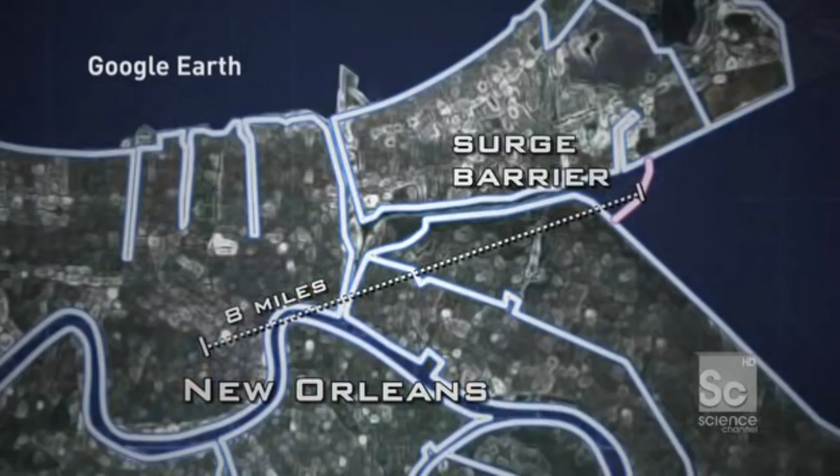To avoid this disaster happening again, the surge barrier is being built miles away from downtown New Orleans, where it can stop the water before it enters the city. Instead of waiting for the storm to come to them, for the first time, they are taking the fight to the storm. Is this a new way to think about battling hurricanes?

Nowhere in the world have we built a wall trying to keep out 25, 26 feet of water. No one's ever done it before. And this height here on a storm surge is unique. You gotta remember, the hurricanes that come to New Orleans are bigger, meaner, and there are more of them.

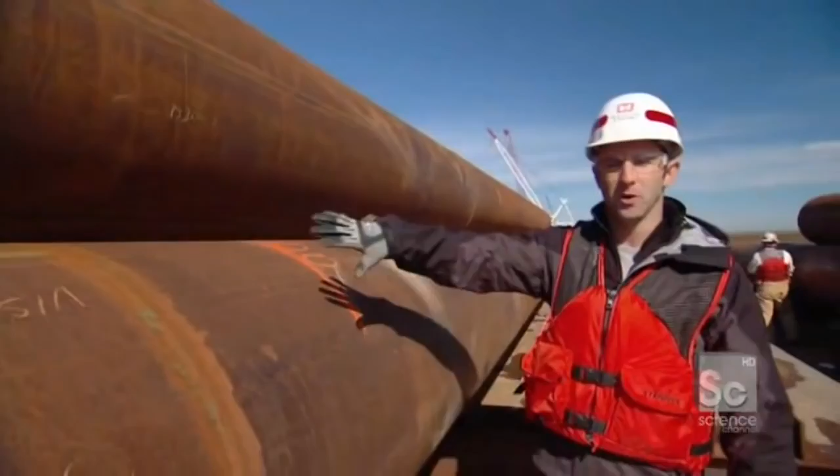To hold back a 26-foot wall of water, the barrier is fortified by 628 batter piles. When the storm surge hits the wall, what pushes back and keeps that wall upright and strong are these guys right here. They're called batter piles, and they're basically 288-foot-long steel tubes inserted into the back of the wall that support it and transfer all the loads of that storm surge into the foundation.

Since there's no bedrock to hold the pile in place, over 80% of the wall is actually below the mudline. The deeper the pile is driven, the more friction there is to hold it in place. Each pile is almost as long as a football field and placed at an acute angle for added stability.

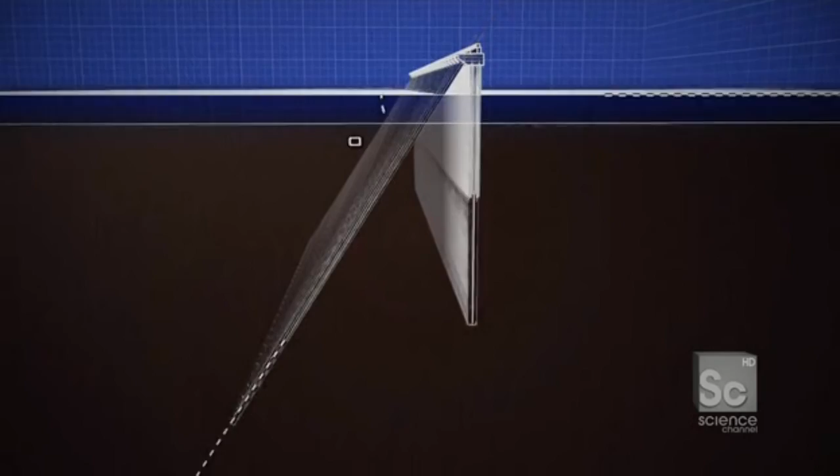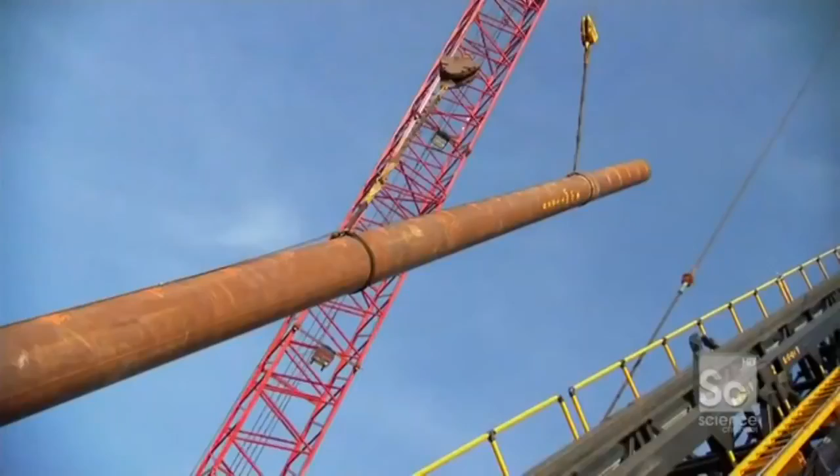What'll be interesting about this lift is that this pile right here is horizontal, right? But in the end, we have to get this thing at a 57-degree angle to feed it into the machine called the leads. No one has ever attempted to drive piles this size at an angle before.

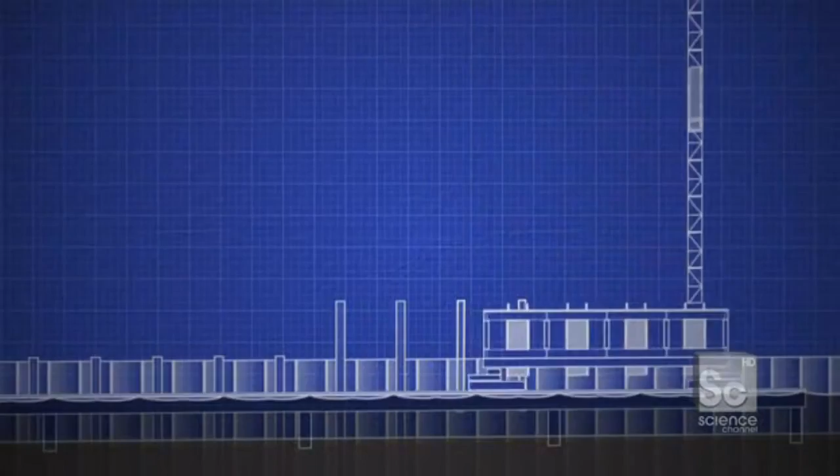To accomplish this engineering first, the Army Corps invented a massive 1,000-ton machine called the leads. Unlike traditional pile drivers that can only hammer vertically, the leads can hammer the piles at a precise 57-degree angle. And with 4 chutes, they can drive 4 piles in a row before moving on, saving almost 5 months of construction time.

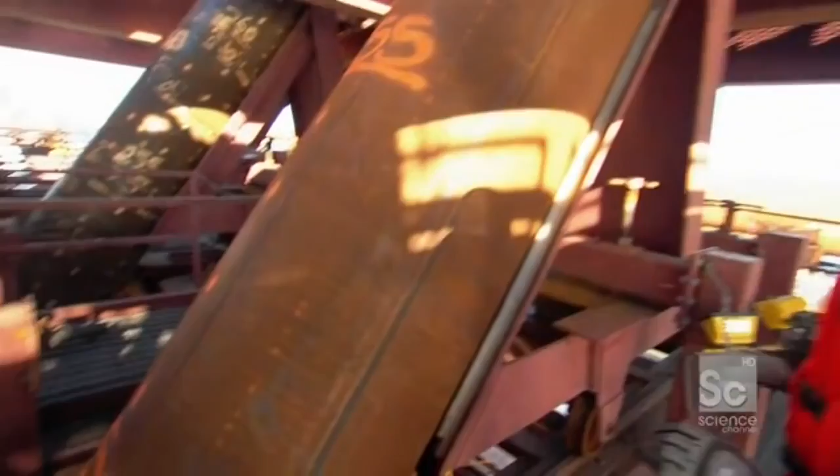So here it is, lowering it through the leads, right? The thing that's leading it right down this 57-degree angle, getting into position so we can start knocking this straight into the ground. Even the leads isn't big enough to handle a 300-foot-long pile in one go.

So they're driven in two sections. The first section is 158 feet long and weighs more than 13 tons. So, Mike, as I'm looking at this slowly creep down into the earth, this is just sliding into the soil below, right? Into the mud, yeah. I mean, there's really nothing down there, huh? Not much. I mean, it's soft. It's so soft that the pile sinks 38 feet in a matter of seconds under its own weight.

After that, the friction from the mud becomes too great, so they have to use a hydraulic hammer. Do I run that hammer down? Absolutely. Time to drive the hammer.

So it's your job to control how much force this thing hits it, when it hits it, and how you drive the pile down. That's it.

So before the sun sets today, we're going to start smacking this thing and send it in? Right now, the next 2 minutes. If everybody's ready, got the earplugs on, let's go. Let's do it. I got earplugs. I'm on. Let's start smacking it.

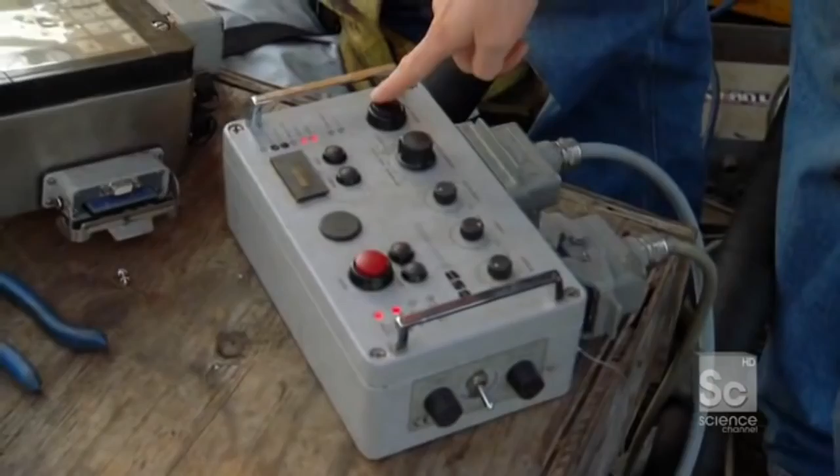Every time that smacks the pile, that pile gets pushed a little deeper into the ground. During the first 158 feet of driving, each blow moves the pile 10 inches. But as the pile goes deeper and friction increases, it takes 40 blows to move the pile that same distance.

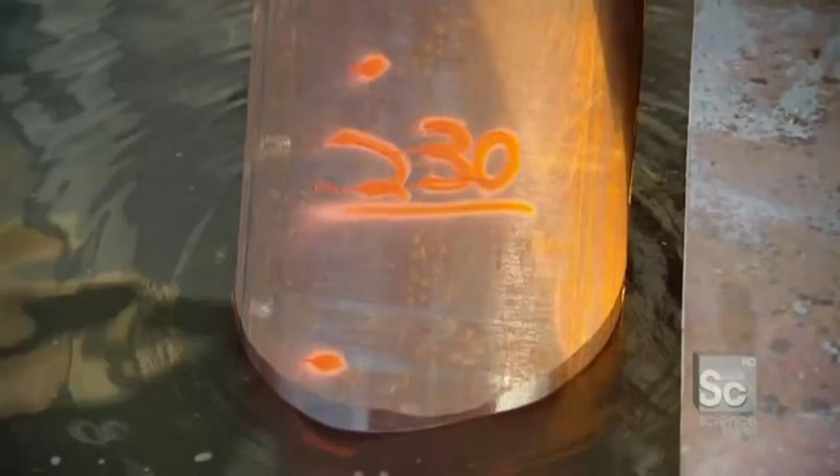So, Mike, the first piece is now in place. Right. And now they're going to bring over the second piece, which is that one right there. Right.

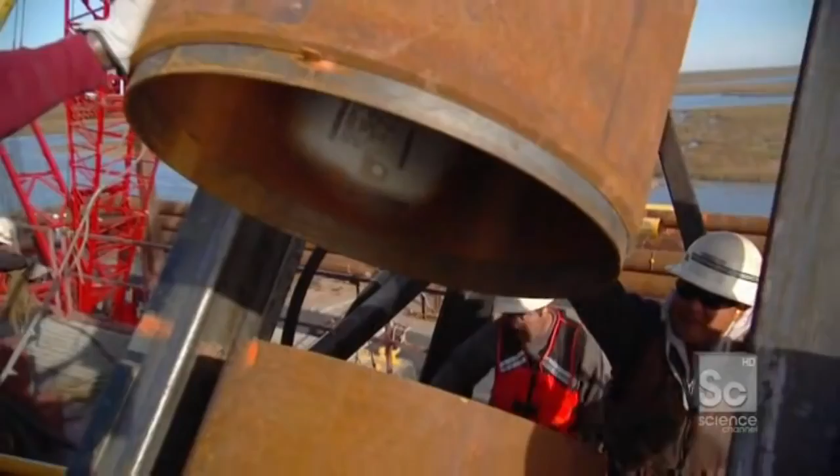Loading like a rocket launcher almost. They have to get the piece in, tamp it down, and line one end up with the next. Line it up, line it up! All right, so here it is, it's coming down. You can see we're basically gonna fit this piece into that piece, have a little bit of an overlap, and that's what they're gonna weld together.

So if you look right there, you can see the weld's been completed. Those two separate pieces have now been spliced into one, and now that pile is 245 feet long. The weld looks good. Yes, sir. We're ready to drive it, put it on the ground. This is the last time we're gonna see this pile in the air.

So let's flip the hammer on and start smacking. Are you ready? Yes, I'm ready. Whenever you're ready. I'm ready. I was born to smack pile.

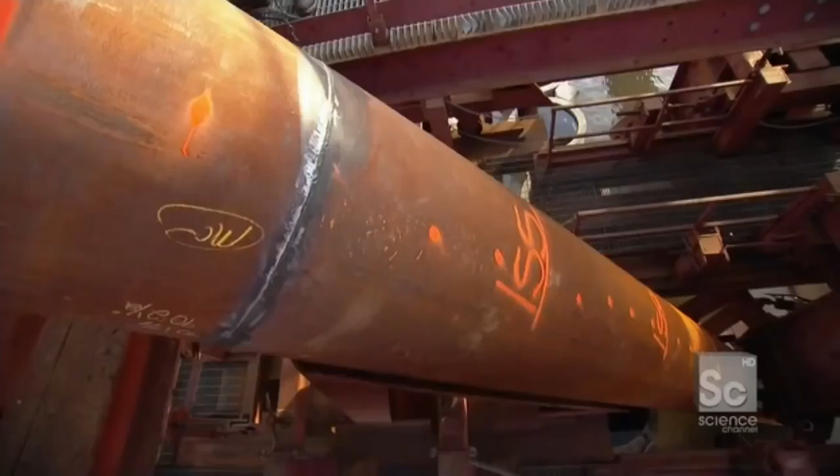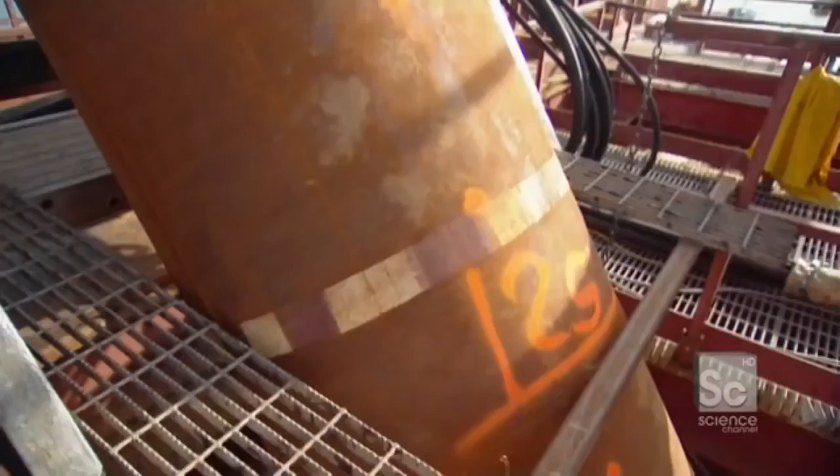It takes around 1,200 blows to get one batter pile into place. And to stay on schedule, they need to install 628 of them in just 6 months. A total of about 750,000 blows. Normally, a project of this magnitude would take more than 17 years to complete. To make New Orleans safe as quickly as possible, the Army Corps is attempting to finish the surge barrier in just 3. To pull off this incredible feat, this crew has to work through hurricane season.

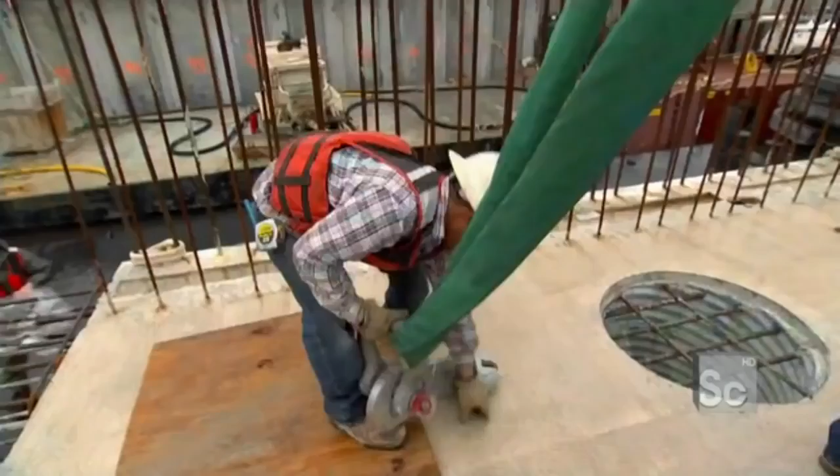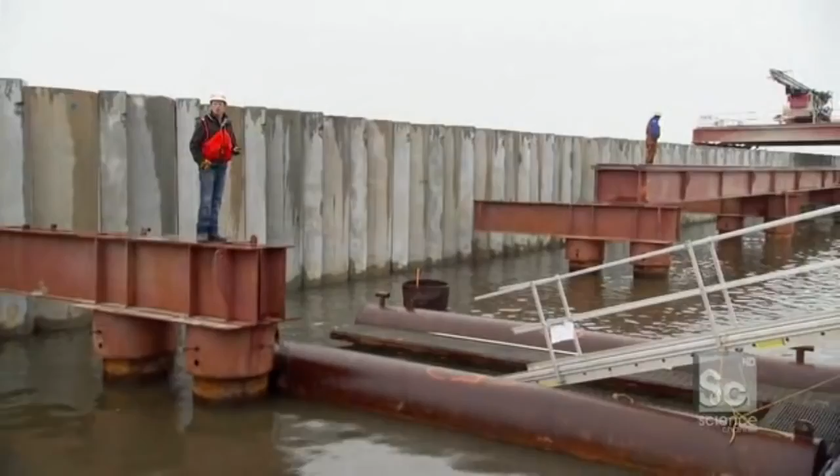So engineers came up with an innovative solution to get the job done right and done fast, even in rough waters. One of the biggest challenges when you're working in the middle of a lake is having a level surface on which to work, because barges move and tugboats pitch and roll as well. So in order to have a flat surface to accurately work, they developed that system right there called a trestle. It's a semi-permanent track that moves along with the wall construction. A trestle is basically a huge railroad track anchored into the lake bed, providing a stable workplace for large machinery.

The project has 1,000 feet of track for the entire 10,000-foot-long wall. So to keep construction moving forward, the trestle team has to leapfrog 50-foot sections from one end of the site to the other up to 6 times a day. 50 feet of trestle track's about to go from this barge up in the air and extend our construction platform another 50 feet.

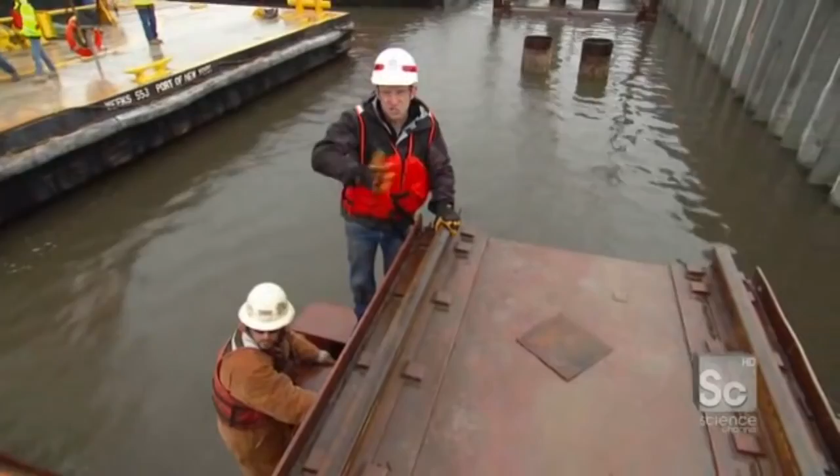6 bolts need to be in place to ensure a solid connection between the trestles. The issue is we have 5 out of the 6 bolts lined up, but one side is slightly higher than the other side, so we're having a problem getting in the final bolt. The holes are about 3 millimeters off. In order to make that space to get it through, we're going to torch it out.

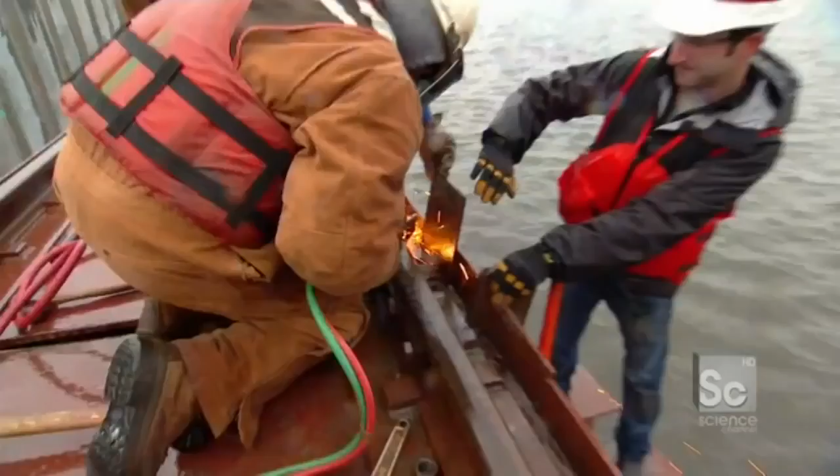Would it not have made sense for me to move before he started? On the plus side, it's really cold and rainy. My right hand is much warmer than it was a minute ago.

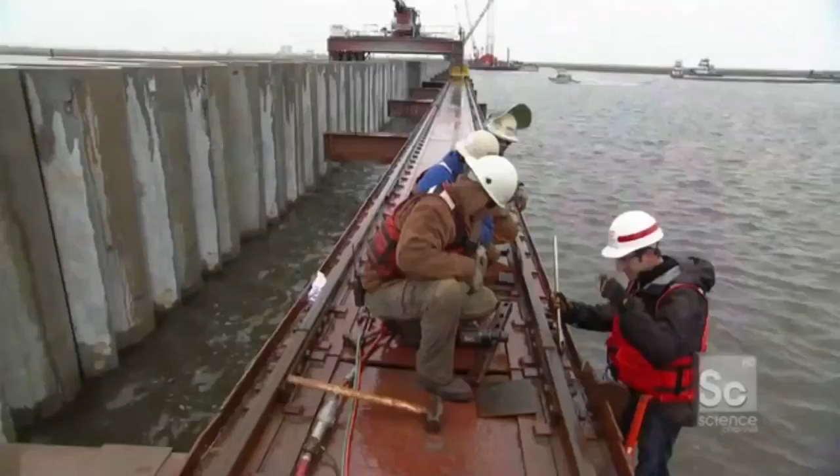Well, after cutting, torching, hitting, and some emotional consternation, the sixth and final bolt gets a smack and is through. This track has now been extended 50 more feet. The construction site will extend. Can we go home? We finished now?

Up next, building new lives and new hope in the 9th Ward, with houses designed to fight back against the worst Mother Nature has to offer. These houses are being built to survive another Katrina.

When you think about what took place in New Orleans, you think about Hurricane Katrina. But the truth is, the actual damage wasn't from the hurricane itself, but from what it created: a storm surge. A storm surge is a wall of water pushed out in front of a hurricane by high winds and low pressure. During Katrina, it caused waters to rise more than 20 feet, overwhelming the existing hurricane protection and flooding almost the entire city.

Katrina's storm surge was responsible for 90% of the destruction in New Orleans. And hardest hit was one of New Orleans' poorest neighborhoods, the lower 9th Ward.

I was actually here filming 5 years ago, right after the event, and it was harrowing. There were houses that were just blown clear off their foundations. Others were torn in two. I saw a house that was actually sitting in a tree. 5,000 homes were lost in this neighborhood alone, and less than 20% of its residents have come home to rebuild.

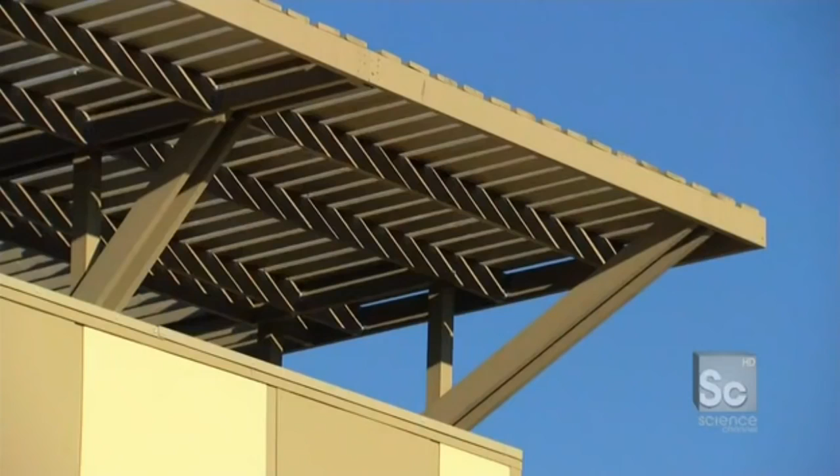Just come back. To help people like Miss Leggett come home, actor Brad Pitt founded an organization called Make It Right. Their mission: build 150 cutting-edge homes, safer and more sustainable than ever before, starting in the most devastated neighborhood in New Orleans.

This is one of the areas that's hardest to build back because of the soils and because of the amount of displacement that occurred. We plant the seed in the toughest soil, in some of the toughest situations, in hopes of starting development throughout New Orleans, but starting in the hardest area. It's incredible, an amazing project. No matter which aspect we look at, there's something incredible going on.

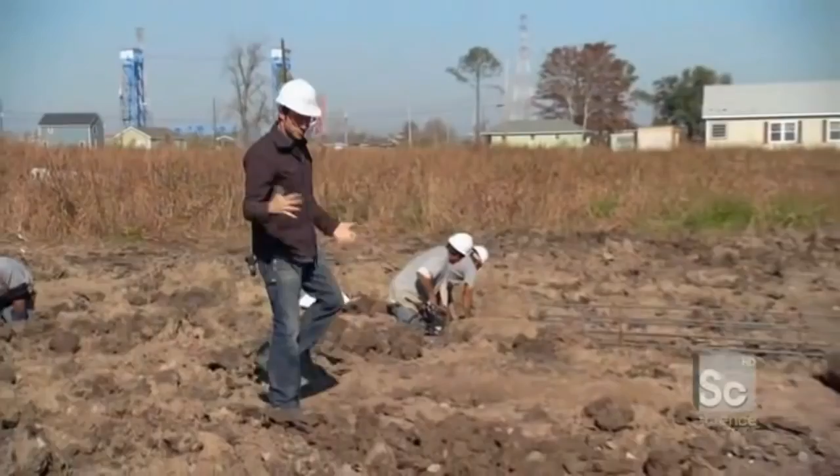These homes are re-engineering the lower 9th Ward and transforming it into one of the most hurricane-resistant neighborhoods on the planet. But one of their biggest challenges isn't wind and rain, it's the ground itself. Like most of New Orleans, the lower 9th Ward is built below sea level, which basically means the ground below me is a big swamp. You build a house here, over time, it's gonna sink.

So to prevent that, the Make It Right houses begin construction by driving massive 40-foot-long piles into the earth. This is what they had before Katrina, and this is what they're getting right now. So these are built to last. These houses are built to survive another Katrina. These piles are revolutionizing how homes are built in this flood-prone area.

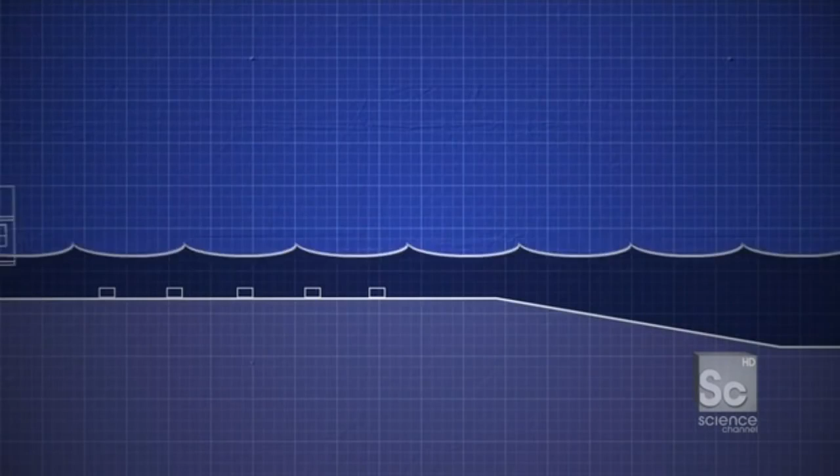Previously, homes rested on top of cinder blocks. When a flood came, the house would be lifted off the blocks and sent crashing through the neighborhood. But now, these wooden piles stabilize the soft soil so it can support a raised concrete foundation. It actually attaches to the house, strong enough to keep the home in place, even in floods more than 12 feet high. Chris, how do you get a 40-foot pile rated to carry 7 tons into the swamp?

You use that machine over there, which is called a sonic side grip vibratory driver that puts out 50 tons of centrifugal force, and it'll push that pile underground in about 2-3 minutes.

So this is it, huh? This is the machine. It's like a construction action hero. My God. Tony, why don't you spin her around so we can look at her? This has got a kind of a Mad Max Beyond Thunderdome vibe to it, you know what I mean? Yeah, I never get tired of watching it work.

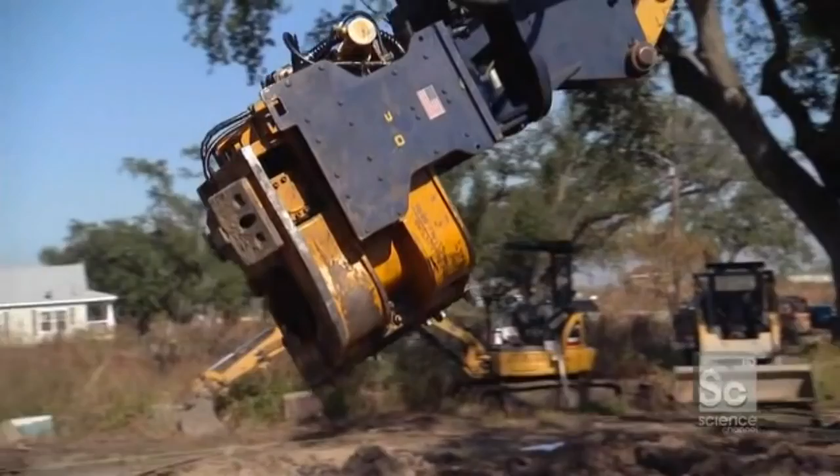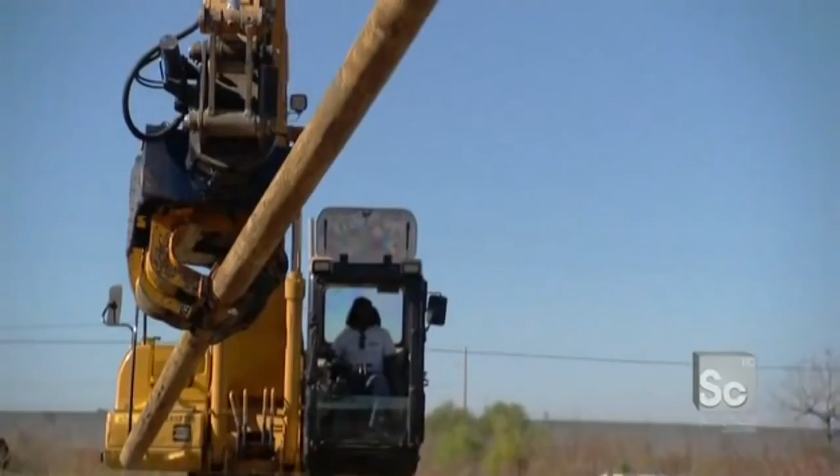No one has ever used a pile driver like this to install foundations in the lower Ninth Ward. Its unique articulating arm can grab, lift, and drive the pile all in one shot. The work gets done 3 times faster than if they used a conventional pile driver. Grabs it by eye, swings it into place like it's his extended arm. Exactly. Puts it right down in a matter of moments.

Tony says the only place he really feels at peace is in that machine. You can kind of see that too, right? Yeah, oh yeah. To lift and move a pile requires careful coordination of 6 controls all at once.

Tony's located the pile right in the corner of the foundation. We have a little circle mark for him, and he's just gonna put this thing dead smack. Perfect. He's lined up, he's level. Now it's time to vibrate. Tony, you ready?

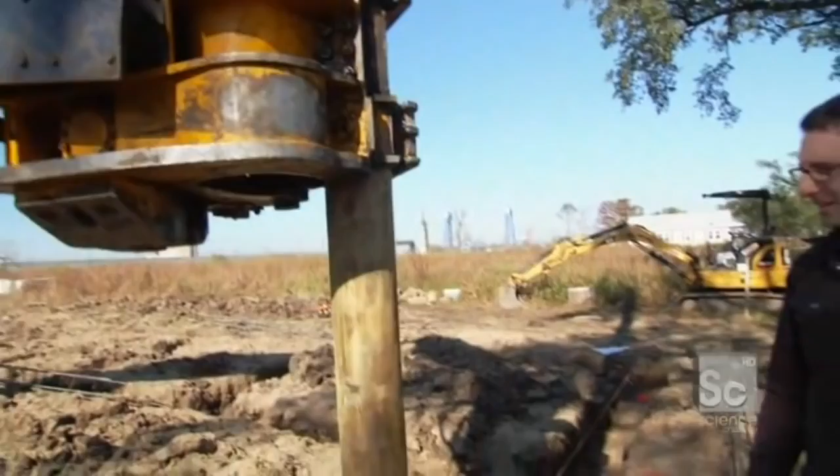You literally feel the ground shaking, within like a 5-foot radius around Tony's workings, like my feet, my toes, my back. I'm itchy right now from the vibrations running through me.

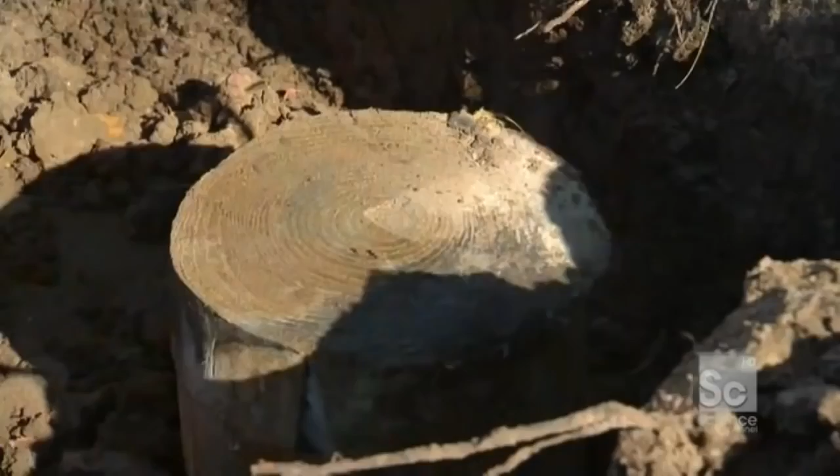So now what I'm standing on, even before the foundation gets here, is 40 feet of pile below me. And it's from this point the house now begins.

Is it hard for a rookie? The hardest part's picking the pile up. Let's give it a go. I'm gonna drop some piles. Okay, so you're Tony. Yes. I'm Danny, nice to meet you, Dan. How you doing, man? I'm okay. We're gonna switch jobs. You do the yelling and walking around and talking and not doing anything productive. Sounds like a winner. And I'll do the work. Sounds like a plan. All right, Tony.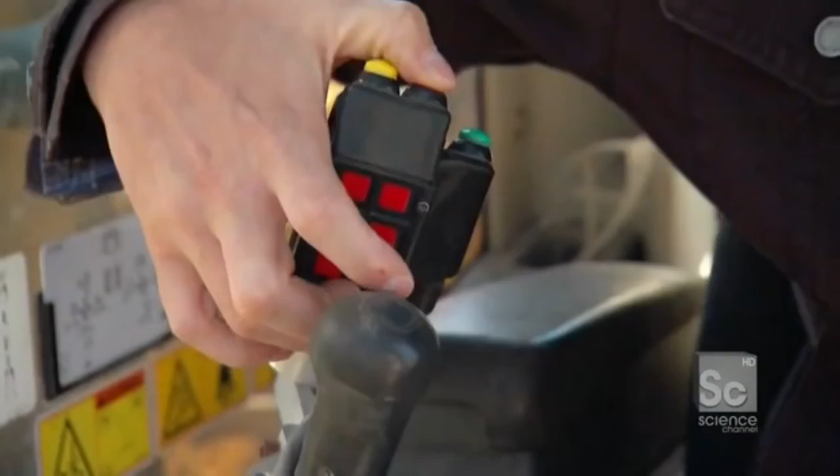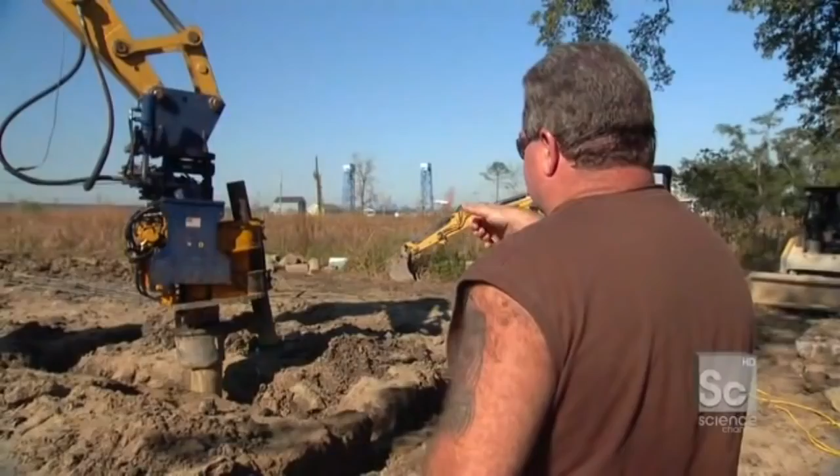Swing left over. Oh, so close, it was like I'm about to eat it. It was like, oh, here we go. Open, open, quick, clean. There we go, come here. Oh, it's in my clutches. It's coming up, I got me a good grip on it. Chris, watch this man, this is gonna be a little piece of magic. Can't beat that. How's she looking? First time out, that's not too bad.

Now tell me something, you're from here, right? Born and raised here. So regardless of the next event, next storm, if it happens again, you come back? We're coming back, this is home. This is life, this is reality here. I come here sometime with my kids just to show them the houses, you know? This is what we're doing, we're bringing people home. It's good stuff, man. No, it really is.

Thank you, it's amazing. Up next, putting together the strongest wall ever built, and we're gonna literally thread the needle in some of the worst soil conditions in the world.

Since it was founded in 1718, New Orleans is a town that's been working against the elements, primarily because 50% of this place is located below sea level. But for the first time, New Orleanians are trying something new, working with nature instead of against it. New Orleans is built on top of a giant marshland, which for millions of years naturally absorbed thousands of gallons of rain and floodwater. Today, most of that spongy marsh is covered by pavement, causing significant problems for this flood-prone city.

In a typical situation, when it rains, what happens to that water? How does New Orleans deal with it? That water runs off, goes to our curb and gutter, goes about 8 blocks to the north of us, and is pumped over a levee at about 2 cents a gallon. Okay.

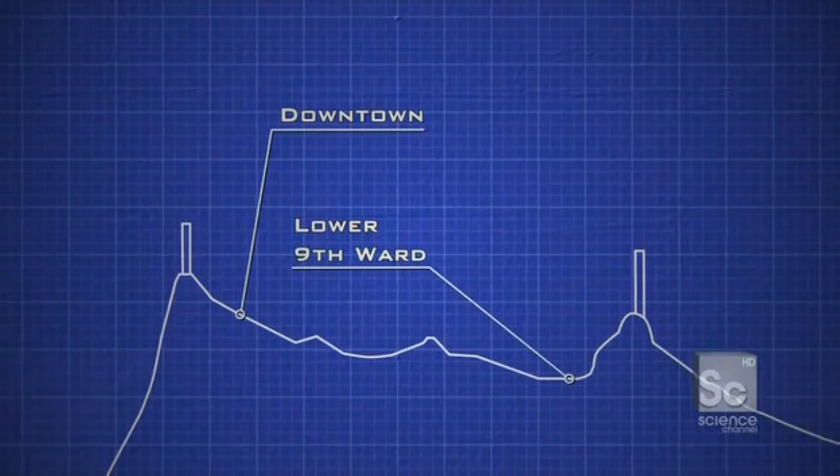Over half of New Orleans is located below sea level. This paved city is basically a big bowl. When water comes in, the only way to get it out is with pumps. So when the pumps failed during Katrina, the lower Ninth Ward was left underwater for more than 3 weeks.

We're in a situation where our community has a real fear of water, and it's a valid fear of water. So the folks in this neighborhood have a different mindset on water, and we're trying to change that paradigm.

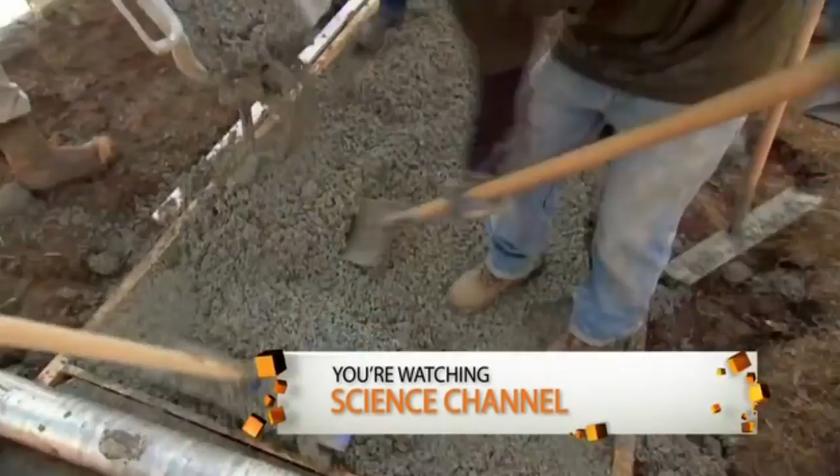To make sure this neighborhood is not left underwater again, engineers have found an innovative solution to radically reduce the need for pump stations, called pervious concrete.

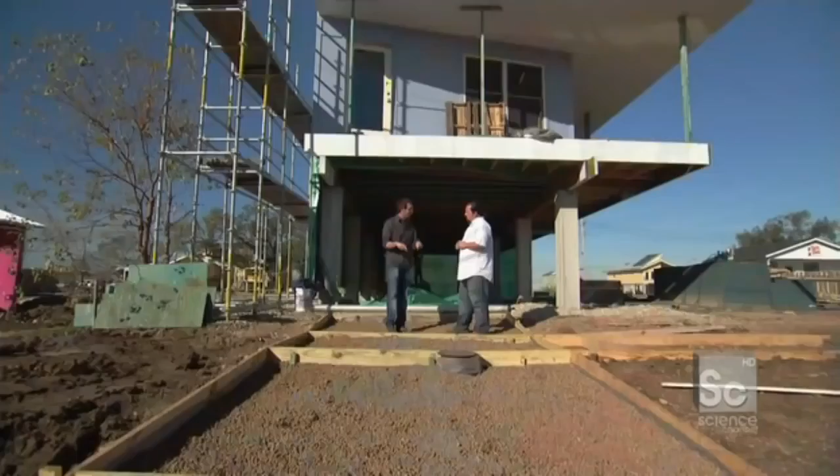As water runs off of our site, it does the opposite of what typical pavement does. Instead of a giant table that tilts water and flows it to the curb and gutter, this is a giant sponge that accepts rainwater, stores it in the concrete and below, and doesn't hit the curb and gutter and run off our streets. So you're telling me this driveway and this sidewalk, when rain hits it, it's actually going to absorb that water?

Correct. Unlike conventional concrete that repels water into the storm sewer, pervious concrete absorbs it. Filled with tiny air pockets, it allows water to flow through it and into the native marshland below, where hundreds of thousands of gallons can be stored naturally.

Do you have any actual finished stuff that we can see? Yeah, we have a little mock-up right here. It actually does look like a Rice Krispie treat. Rice Krispie treat. Look at that.

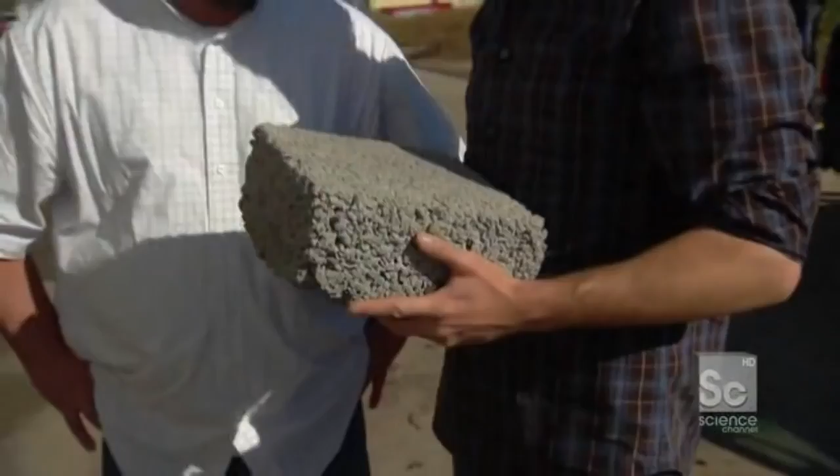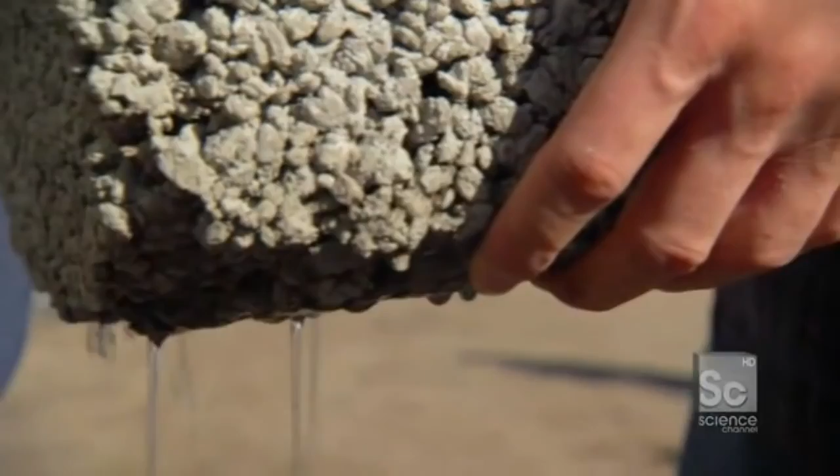All right, let's simulate right now. I'm a driveway, you're a rainstorm, and the rain's coming in. It just stores up, it's just eating it like a sponge. And then it comes out the bottom. Look at that. Now, typically, all that rain we just dumped down would go from this driveway into the sewer system and have to get pumped out. Correct. At ultimate build-out, we will be saving several hundred thousand gallons of water hitting the storm sewer every rain event.

And that all starts with you, me, and a bunch of guys pouring some concrete. Absolutely. Here it comes.

It doesn't look normal, right? It's much drier, thicker, and chunkier. Because of this consistency, pervious concrete pours much slower than conventional concrete and dries much faster.

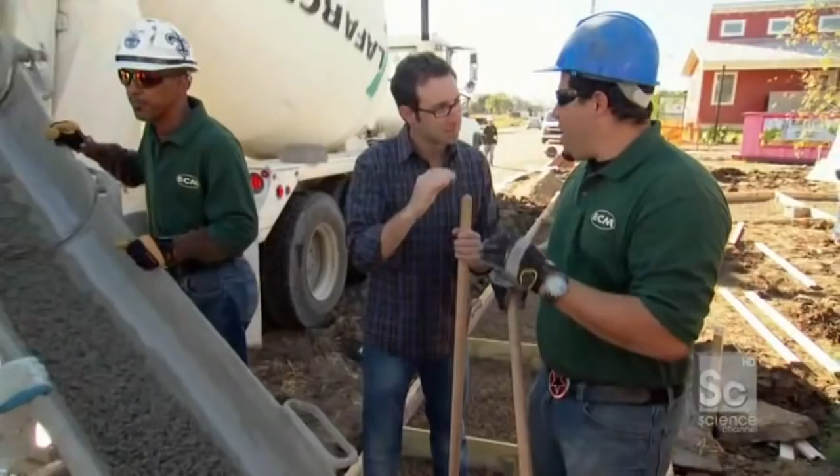So we have just 15 minutes before the concrete sets. So we're actually trying to push the concrete out, but then actually compact it. Yeah, we're gonna compact it. We're gonna pour it three-quarters of an inch higher.

Got it. What I'm doing right now is sort of the opposite of what you do with normal concrete. Typically, you vibrate concrete to get the air bubbles out. Here, we actually compact it tight to get lots of air bubbles inside of it. That's how the water goes through it.

Compacting the concrete is the most critical part of the process. If it's compacted too tight, it won't absorb the excess water. Too loose, and it'll crumble. To do the job quickly, they use a specialized 150-pound roller called a screed.

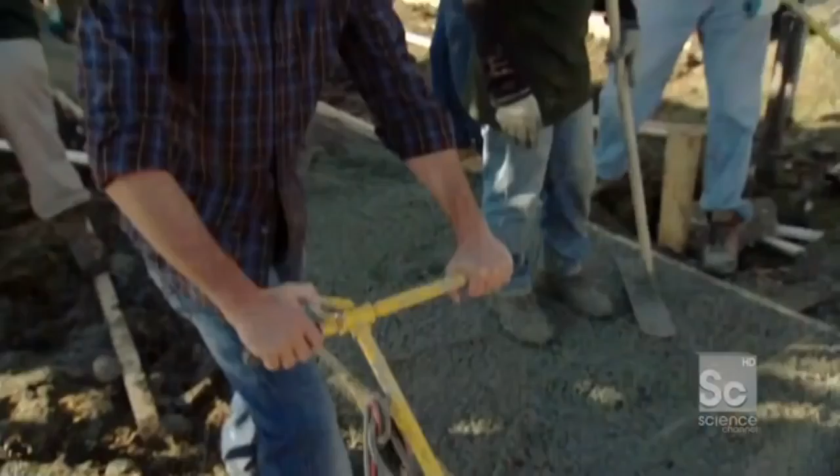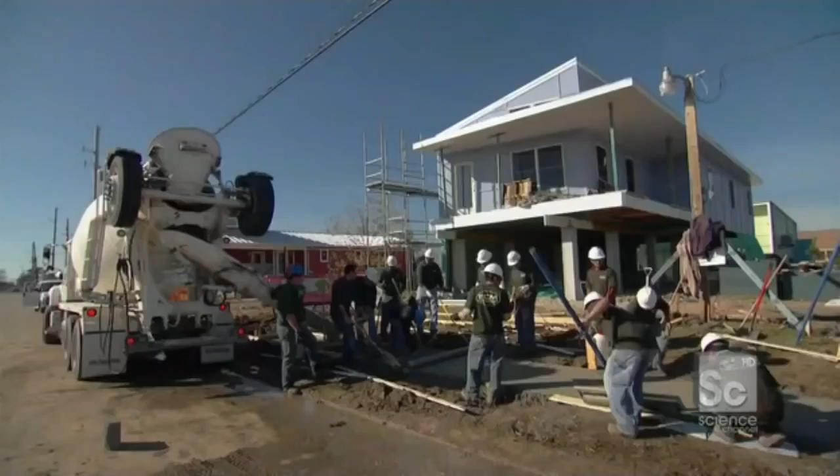Ready? You want to pull it? Yeah, now I'm pulling it. All right, come to me. Here we go, stay with me. Here we go, nice and slow. I'm making pervious concrete. You know why? Because I don't want concrete to push water into the sewer system, do you? No, you don't. Good job, good job, that was perfect.

Beautiful. And although it may not look like it, this is actually the finishing touch. This is the layer of concrete that you'll see every time you walk down the Make It Right streets. Big, hard, dense Rice Krispie treat that all the while is sucking up the water and making sure it does not go into the streets. I love it, man.

The concrete will absorb 5 gallons per hour, using Louisiana's natural marshland to keep the neighborhood dry. That same absorbent soil, however, is the biggest problem for engineers building the 2-mile-long surge barrier.

So for me, what I'm fascinated by is that you want this to be strong and heavy and beefy. But if it's too heavy, the soil's so weak your wall will actually start sinking. That's one of our challenges. We need a very strong wall, but you also need a light wall, comparatively speaking, for concrete of course.

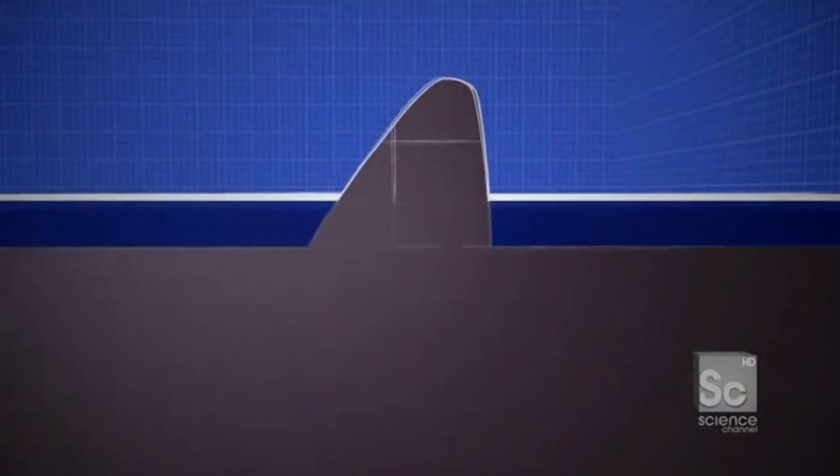We can't build a Great Wall of China here because the massive weight of it would simply sink out of sight. Instead of building one solid structure like most levees or dikes, engineers designed the New Orleans surge barrier as an A-frame. It uses half the material, but it's actually stronger than a solid structure.

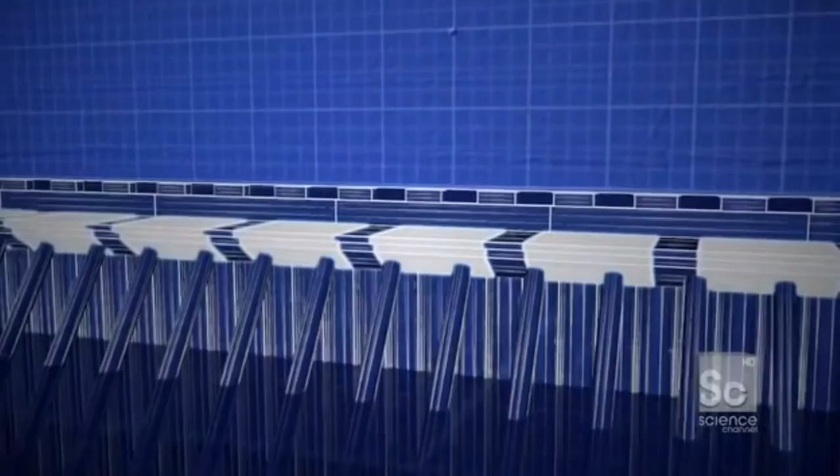The key to its strength? 330 concrete caps placed at the top of the A. They link the vertical piles to the batter piles, directing the force of the storm from the front of the wall, through the batter piles, and down into the marsh, dispersing the loads and keeping the wall strong but light.

All right, so Vic, when the soldier piles are in, the batter piles in place, what ties them all together and makes them one structural system are these guys right here. That's right, these are caps. So essentially, your chain is as strong as your weakest link. Yeah, absolutely, and this is the link, essentially. This is what connects the two types of piles. This 96-ton piece of concrete, very high-tech design, transfers that energy.

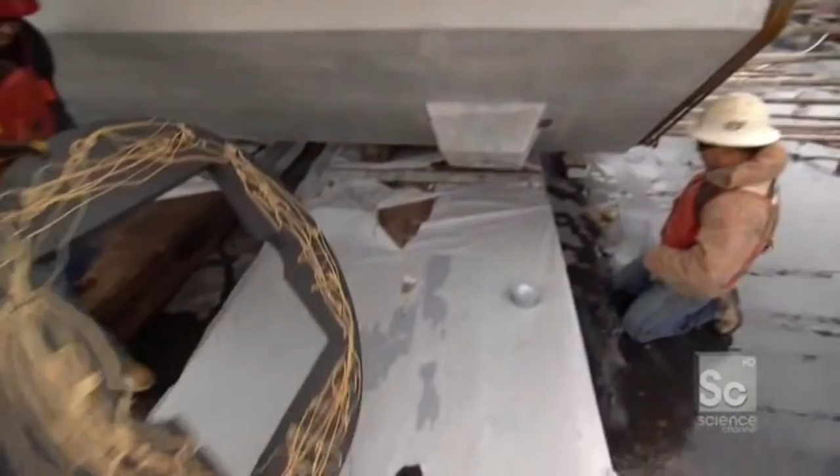Before the cap can be lifted, each joint has to be reinforced with a waterproof seal installed between the cap and the piles. This is the seal, right? It's like the gasket, yeah, to hold the concrete on. Keep it tight. Yeah, to make sure the batter pile meets the cap and you get one tight joint.

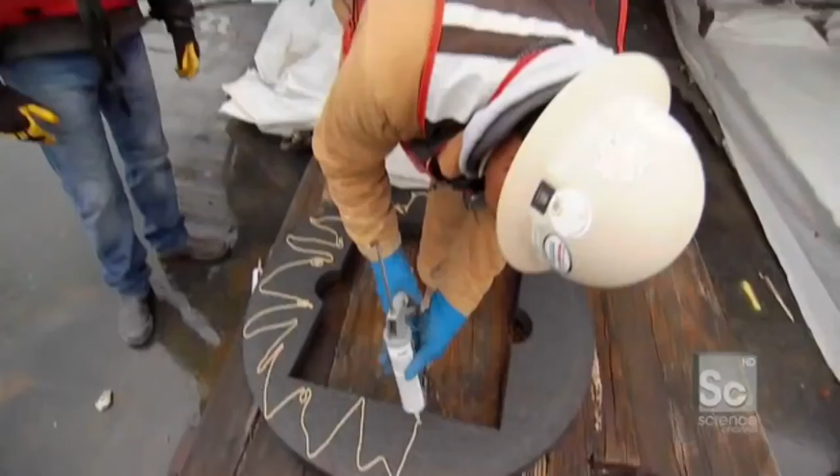The seal between the cap and the batter pile is created by the weight of the 96-ton cap. Luis, AKA Jackson Pollock of the glue, uses construction glue to hold the seal in position while the cap is lifted up onto the wall.

All right, Luis, let's pop it on. Okay. 96 tons, holding back 200 billion gallons of water. And during construction, duct tape.

How's she looking, Luis? Looking pretty good. Pretty good? Yeah, looks good. Very good? Very good, I say.

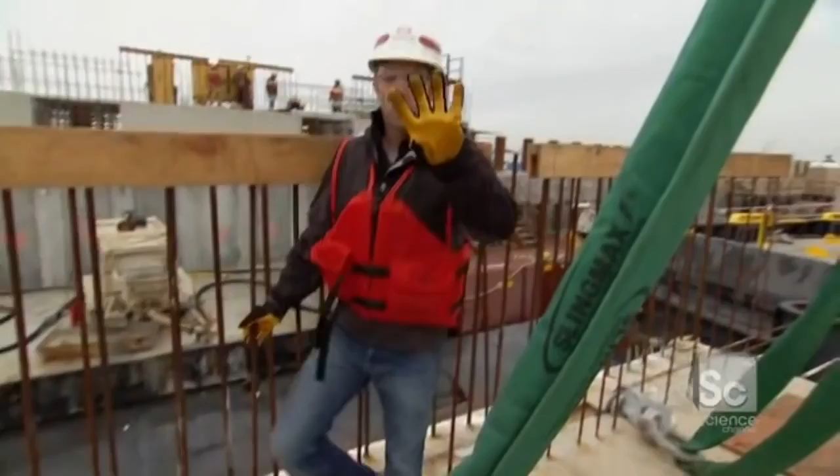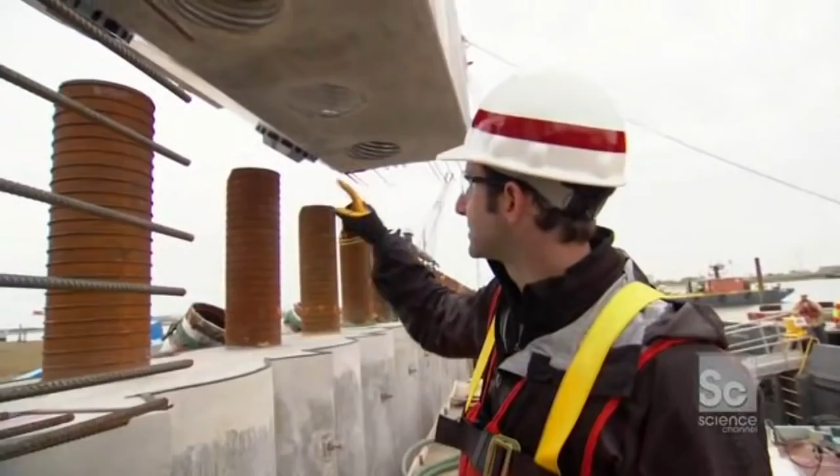Okay, that's it, all four shackles are attached. This now 96-ton cap piece is about to get lifted up from this barge and placed atop the flood wall. The 300-ton crane is located on a barge, causing the cap to bob and swing during the lift, making precise alignment a real challenge. We're going to literally thread the needle, take these 3 shear pins, which extend the soldier piles, and put them right into the cap, fusing them into one.

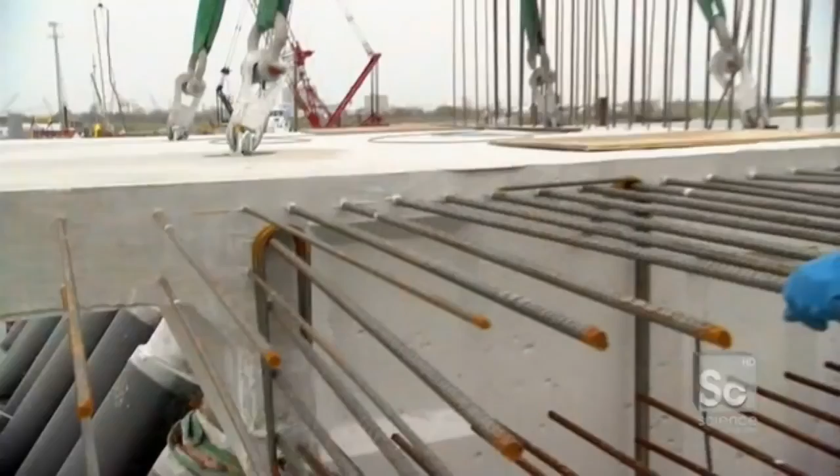Once in place, the cap transforms the wall from 5 separate elements into one structural unit for the first time. Even as it comes down a few inches, 96 tons or otherwise, a little bit of motion can still move the thing. So we're shifting over just a couple millimeters.

So as you can see, the cranes are detached, sending the shackles home. This is in its final location, 96 tons lined up within millimeters. One down, move on to the next one. Up next, we're going. Come to Papa.

Racing to fuse the wall together with one of the fastest concrete assembly lines ever designed. You can open it on up now. Open it on up. But first, what wind speed can the new Make It Right houses in the Lower Ninth Ward safely withstand? The answer after the break.

The answer to our trivia question: the Make It Right houses can safely withstand 200 mile-per-hour winds, enough to survive a Category 5 hurricane. Given the amount of investment that's going into saving this city, sometimes the question is asked, should we save New Orleans? But it's important to point out that this is more than just Mardi Gras. New Orleans represents 1/4 of all domestic oil production for America. The Port of New Orleans is one of the most important ports we have. It's the very gateway for all shipping traffic to the Midwest. This port is so important, it's been defended for more than 200 years.

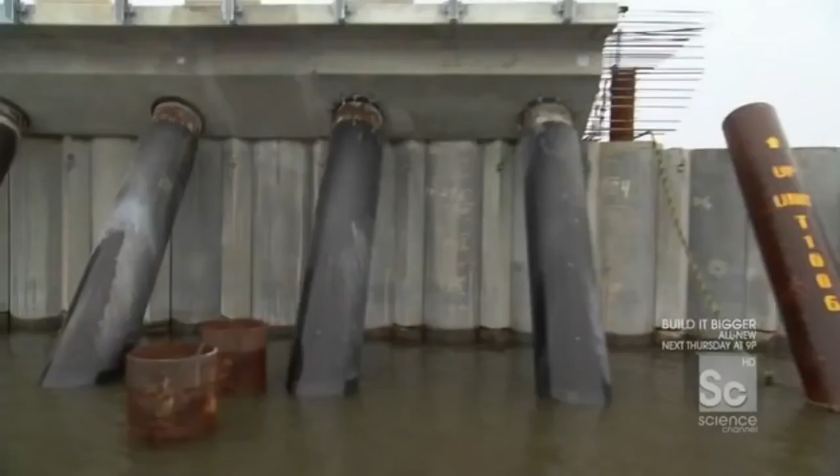The surge barrier is designed to continue protecting the port and the 2 million people in and around New Orleans for years to come. We're constructing a wall here which we know is pretty robust. Several hundred years from now, this structure will still be here because nobody's going to take it. It's not coming out anytime soon. So the reality is this will provide viable surge protection for the city of New Orleans for a long time to come. This massive wall is engineered to last for 100 years, but they have to build it in just 18 months.

And you guys have basically designed a system for speed. Yes, for speed, big time. Engineers have been thinking about this for a long time. We're just making it work.

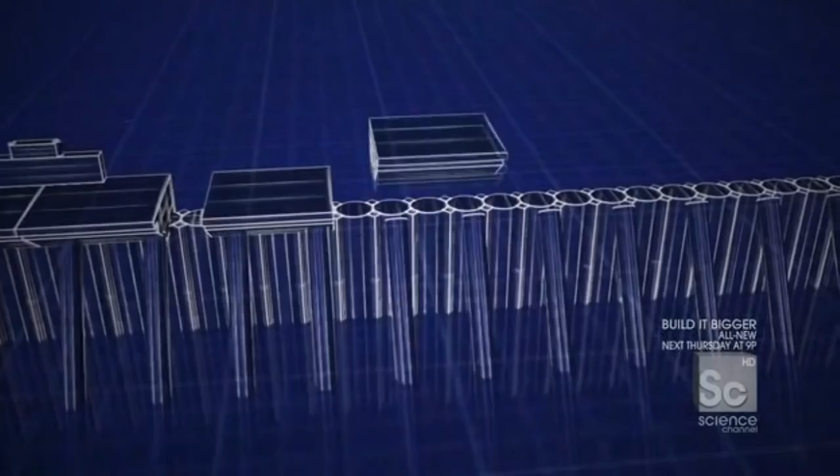To save time, they're using an assembly line. First, a crane drops in prefabricated concrete caps, leaving a 6-foot gap between them, not wasting time lining them up. Then behind them, another crew fuses the caps together with poured concrete, smoothing out any misalignments. This system shaves off more than 6 months.

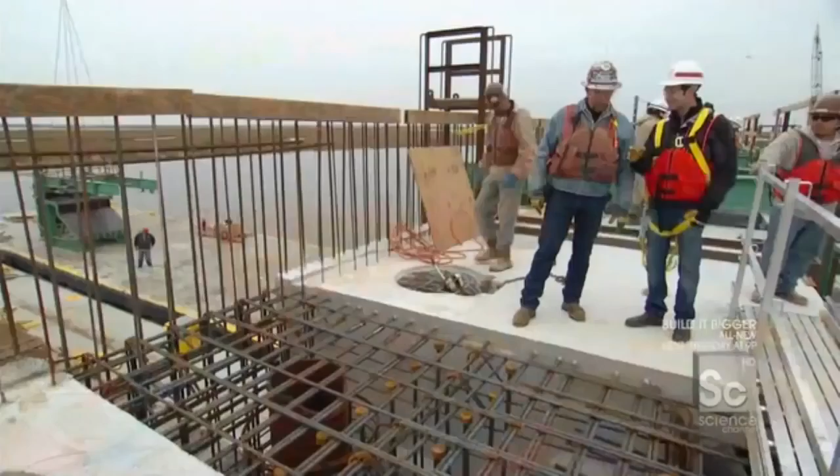So essentially, rather than having to worry about fussing and getting it just right with millimeter tolerance on site, they just keep moving. Even if he's a little bit off, misses the mark a little bit, Rusty comes in and fixes it up. It's like Legos with a little bit of silly putty in the middle.

To fill the space in between the caps, they pour the concrete into custom formwork. What we're looking at right here is essentially a 10,000-pound mold, a shape that we're going to bring into place, shaped exactly like the precast caps. Put it in place, and it binds 2 precast caps together as one.

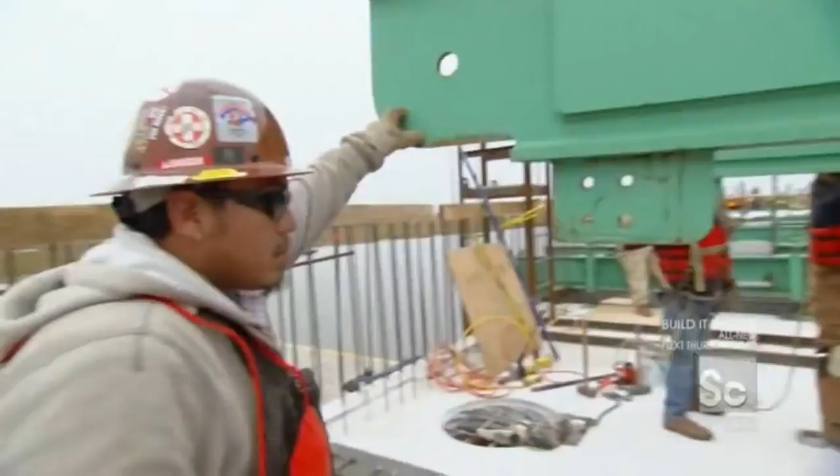Cabling on down, a little bit. All right, we got our hands on it. Hold that, a little bit of right swing. Down easy, 6 more inches. A little bit, all right, hold that. Another shot, boom up now. Booming up. You done this before? A few times.

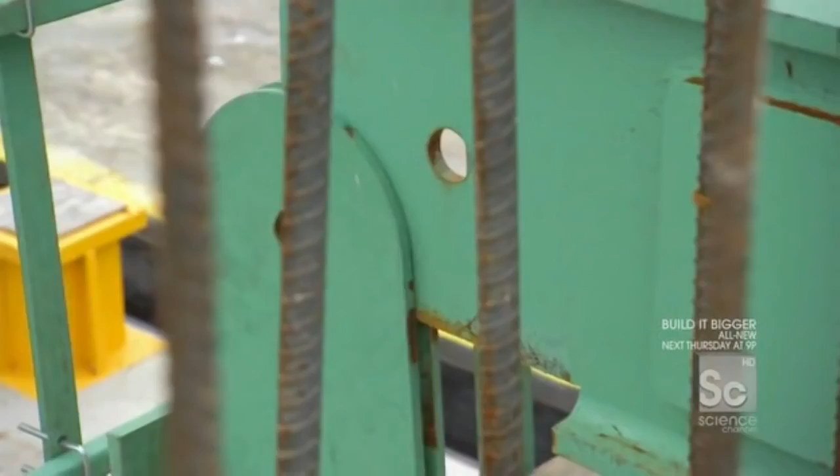The formwork snaps into place with alignment pins, matching up perfectly with the 2 caps on either side. This snug fit allows the poured concrete to smooth out any minor errors in the placement of the cap.

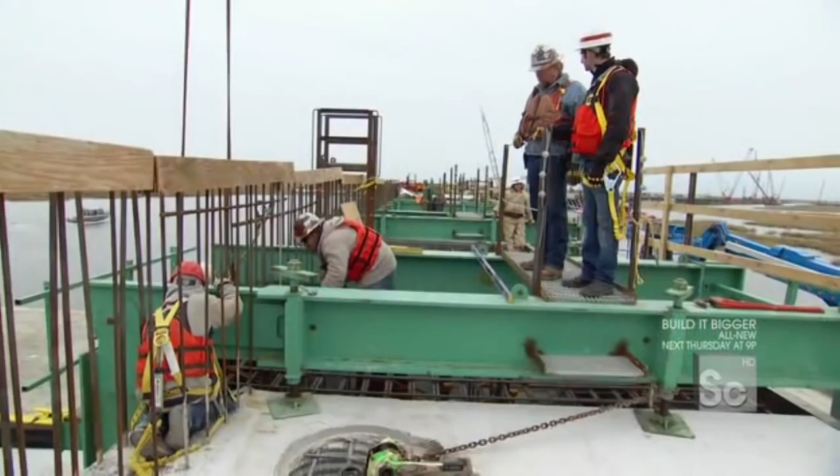Okay Rusty, so when I got here about 15 minutes ago there was a big gap in between these 2 pieces of precast. Big hole. Form is now on, both of them. Done incredibly quickly. Yes, tighten up the bolts, put in the pins, and then pour some concrete.

The team now needs 36 tons of concrete to fill the gap. But they've got to transport it from the concrete plant 2 miles away to the construction site in the middle of Lake Borgne, all before it starts to dry.

There it is, coming around the corner right now. So here's the concrete. It takes about 15 minutes from where we're at right here to get to the dock. And then naturally it takes them about 10 minutes to load and then 15 minutes back out. Since they're losing about a half an hour in transit, Rusty's team now has a narrow 60-minute window to pour the concrete before it cures.

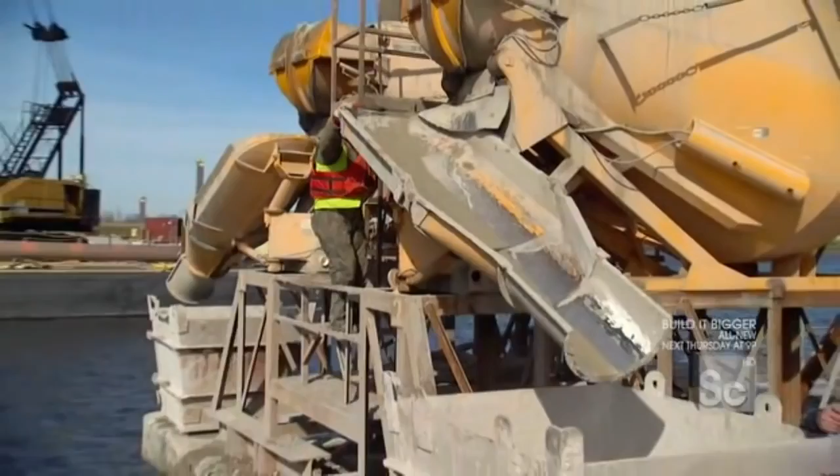We're going, we're going right now. Come to papa. To fill the gap, they have to lift 9 bucket loads in under an hour. You can open it on up now. Open it on up. That's it, let's go get another one. That's it, we just keep going. Well, there it is, as fast as she came, she went.

2 yards of concrete in the hole, down the chute, and in the space. 2 yards go out, 2 more yards are coming in. It just comes in fast. Coming on down, here it comes.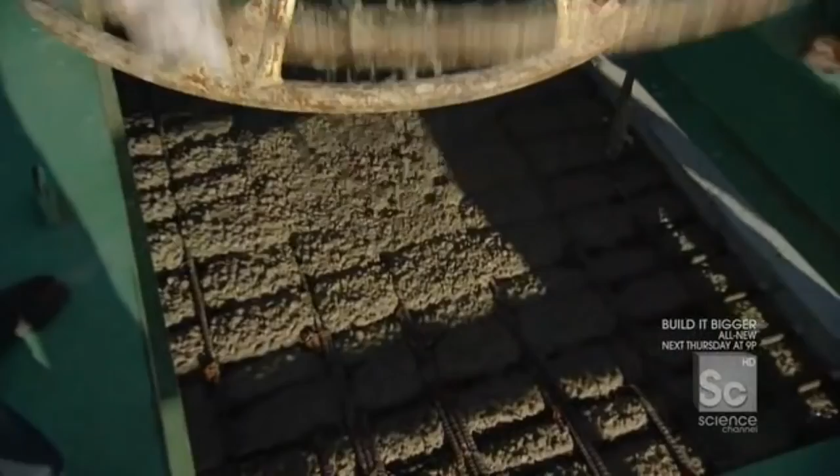Whole thing took us, what, 15 minutes? Probably 15, 20 minutes. When you're doing a job like this, pouring this concrete, it's not hard to remember why you're doing it. Everybody out here enjoys coming out here. But we are building it for a reason and for a cause, to save people's lives, property, all that.

You get a sense that this thing is done right, this wall gets done in time, this city can start to come back? Oh yes, I believe that 100%.

This innovative concrete assembly line is giving New Orleans a barrier that will act as the primary line of defense.

And on a smaller scale, another revolutionary type of concrete is being used as a second line of defense to design homes 3 times stronger than normal. The design of the Make It Right houses is to survive a hurricane, but it's also to last the test of time.

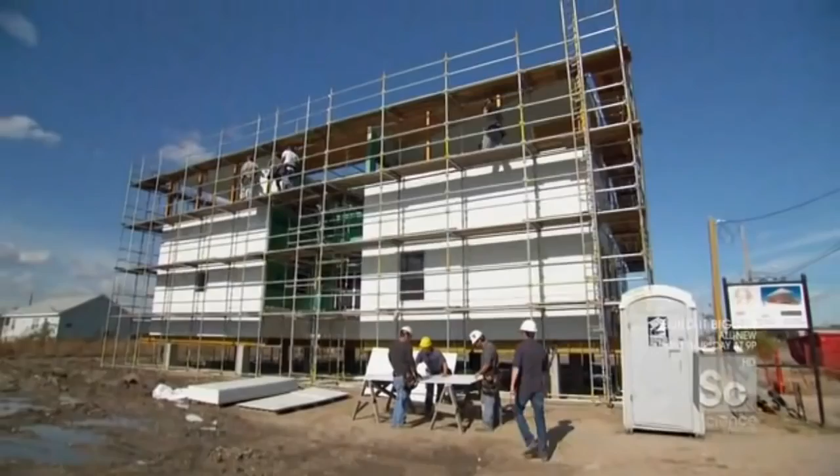So instead of wrapping them in traditional wood siding, which rots over time, they're trying something new. They're wrapping these houses in cement, using something called HardieBoard, a cutting-edge siding made of compressed cement designed to last for over 50 years.

So what do we have in this environment that bangs up the siding so badly? A lot of rain, humidity, storms. You're in the Gulf South, a lot of moisture. So the outside of these houses are kind of getting slaughtered.

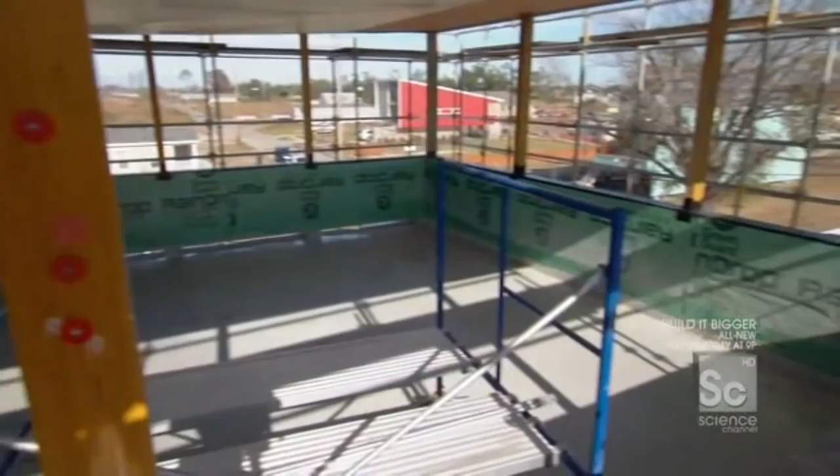And so what's different about this cement board? It will not rot away. This siding is made of an innovative compound that does not mold or rot when wet. Unlike traditional houses that have to be demolished after a flood, this house will simply dry out in the sun. But in order to do its job, the siding has to stay on the house, even in Category 5 winds.

During a hurricane event or any strong storm, there's that suction where they actually pull the skin off the building. If that corner was to come off during high wind, it would take that sheet, and probably that sheet, and that sheet, and keep on going.

They've calculated the position of every nail to ensure the siding is windproof. There's something tank-like about taking a house, wrapping it in a thin cement frame, and keeping your nail patterns hard like rivets. Absolutely, like armor plating. This house is going to be here for a long time.

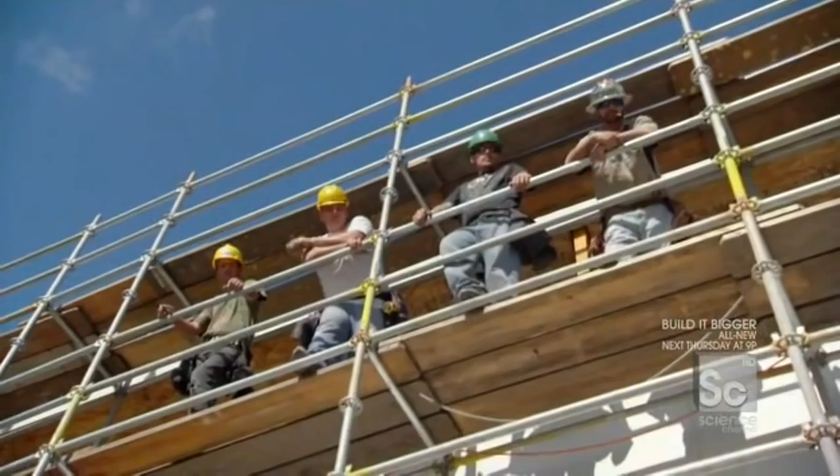So how do we install the cement fiberboard? We got some guys up top getting ready to install some right now. It's only a half inch thick, but this 4x8 piece weighs almost 80 pounds, twice the amount of traditional wood siding. There it goes. Cement board to the sky.

So I'm now standing at the 3rd floor of the house, and what you're looking into is actually an outdoor covered deck, and it's on this underside of this covered area we're gonna apply this board.

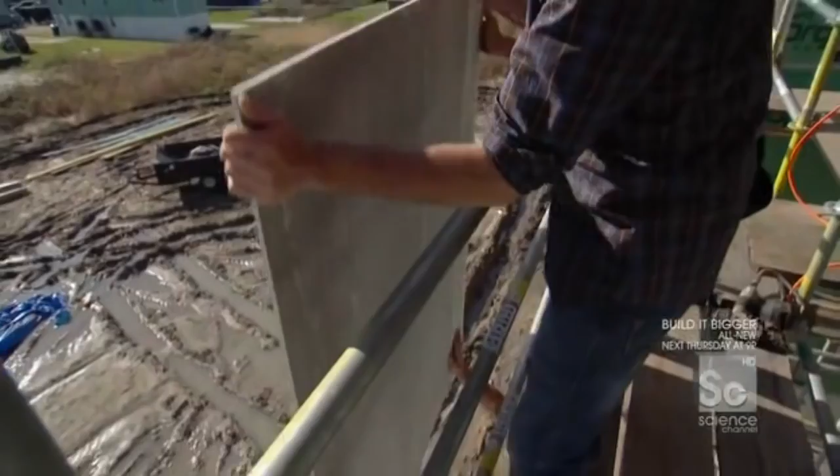All right, fellas, how you doing? Watch your feet. So you're from Louisiana? New Orleans. An amazing place, nice weather, sick architecture. Oh, and heavy cement board. Yeah, we're just gonna kind of roll it over.

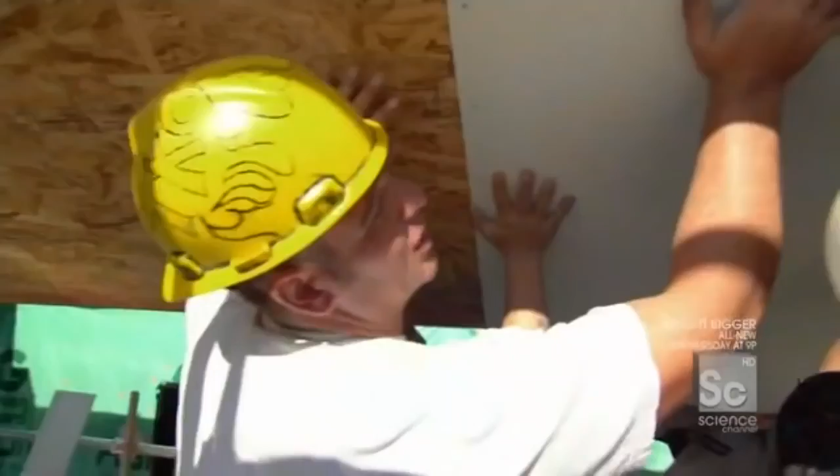It takes 6 people to position this single panel. All the way over? Yep. It has to be perfectly flush with the previous board in order to form a windproof seal. No, a little higher. Come on up. There we are. Who's got a nail gun? Right behind you. Far side over here. Up top? Yep.

That does sound pretty damn tight, doesn't it? Yep. And that's it, look at that. That quickly, about 8 feet of siding, the very outside of the house, what will keep rain out of this thing, keep it dry, and lasting 50 years. Isn't that right, Troy? 50 years. 50 years. Once they put paint on there, she'll last a while.

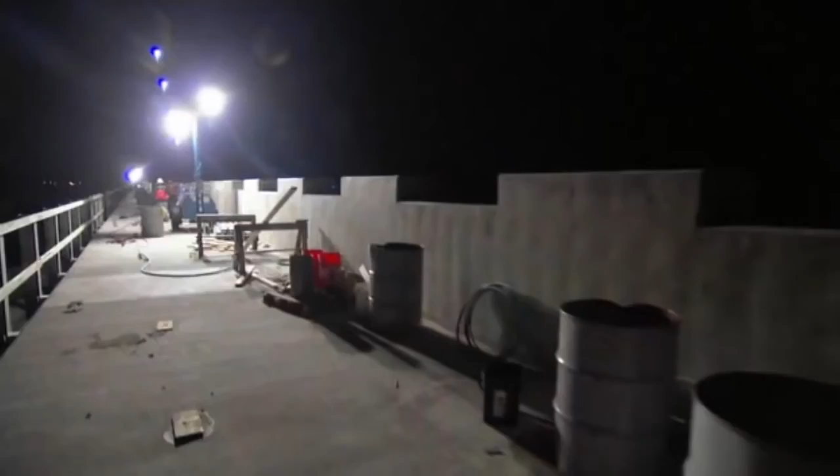New Orleans' new 2-mile-long surge barrier will give residents much-needed hurricane security. But it's difficult to rebuild with confidence until it's done. With the next hurricane season just 9 months away, this construction team is working around the clock to finish in time.

Well, it's about 8 p.m. The sun is set, the moon is out, and I'm going to work right now. You see, given this non-negotiable deadline of finishing this wall before hurricane season 2011, the guys are not just working 7 days a week, but also 24 hours a day.

Rick, Max. Father, son. Formwork crew. What is it, the graveyard shift? Just about, yes sir. It falls to the night crew to finish one of the surge barrier's most crucial elements, the parapet wall.

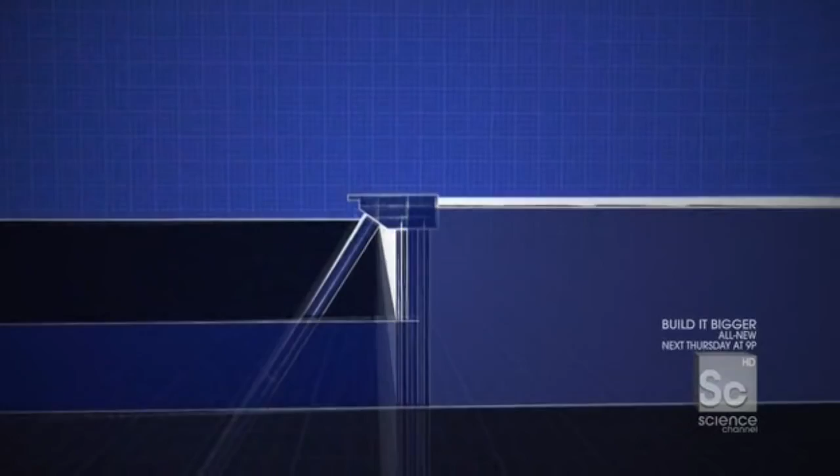You look at it, you think it just looks cool, like it's a castle thing, you got archers shooting bows and arrows. But there's a reason behind it. It's actually part of the system that beats down waves. While the lower part of the wall holds back the storm surge, it's the upper part that takes on the massive waves on top of the surge. Its castle-like notches are designed to chop big waves into smaller, less destructive ones that splash harmlessly on the backside of the wall, preventing millions of gallons of water from ever reaching the city.

In terms of what's actually fighting the storm and fighting the waves, this is what does it, right here. This is the final edge of this thing that's actually going to hold back the water. And we're pulling off that form tonight. You're going to see what it looks like when we pull it off for the first time. The parapet wall is made up of 2-foot-thick concrete poured each morning.

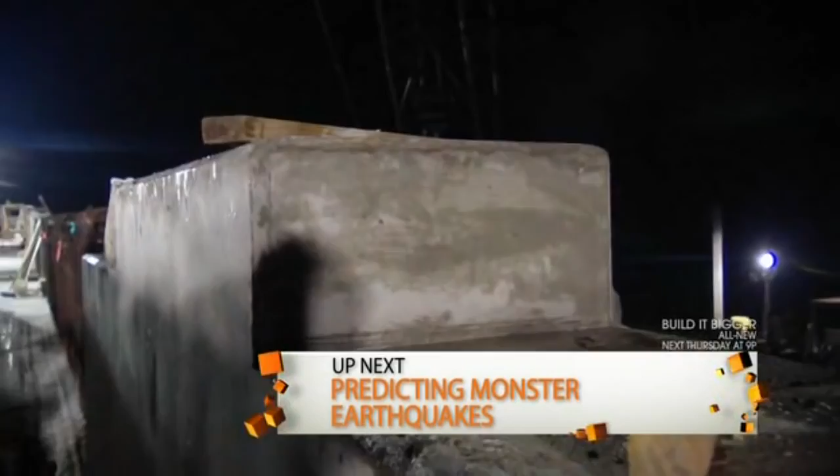To keep the daytime crew on schedule, the night shift has to remove and reset two of the massive 36-foot molds in just six hours. So by day, they place the concrete. At night, we pull the forms, we set the forms. Next day they come back, they pour the concrete. On and on, that's it, it's playing leapfrog. Ongoing, got a mile and a half of it to do. We got to get busy, stay busy.

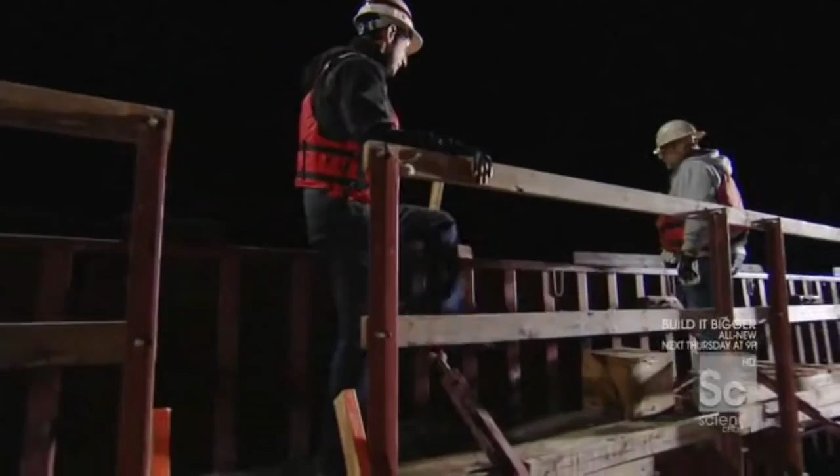Should we do it? Let's do it. Let's get doing it our way. Build on top? On top? Let's go. All right, the forms are 8 feet tall and weigh over 10 tons.

To lift them, the crew needs the biggest crane on site, the mammoth 240-ton barge crane. Rick's putting a little bit of tension in the line to look at the shackle, make sure it looks right, they're even, they're not pulling, they're not buckling. If he's happy, we're going to get off it and start the lift. What do you think, Rick? It's holding good, let's go ahead and get down. All right, the formwork is ready to go. Crane has tension.

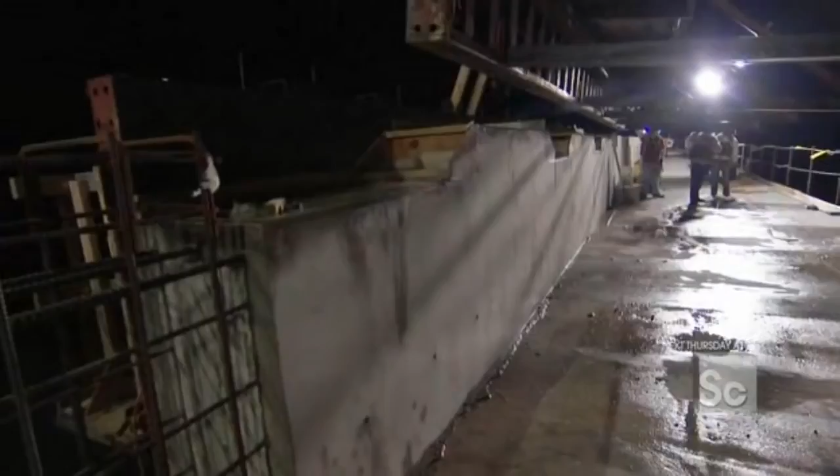And as it comes up, what you'll get to see is the exposed parapet for the first time. So just as we've gotten this thing off, we revealed the finished concrete wall, cleaned it, not a moment too soon. We're going to pop it back onto the rebar and begin the process all over again. It all starts over again. There's no time to waste here, is there? You're holding up the show.

Let's go. The most important step is to knock out the wooden blocks that form the parapet walls, wave-chopping notches. A couple of smacks, pop it up, take the pry bar, pry it off. All the while do it such that we don't damage it so we can reuse it on the next form. You got it, I'm on it.

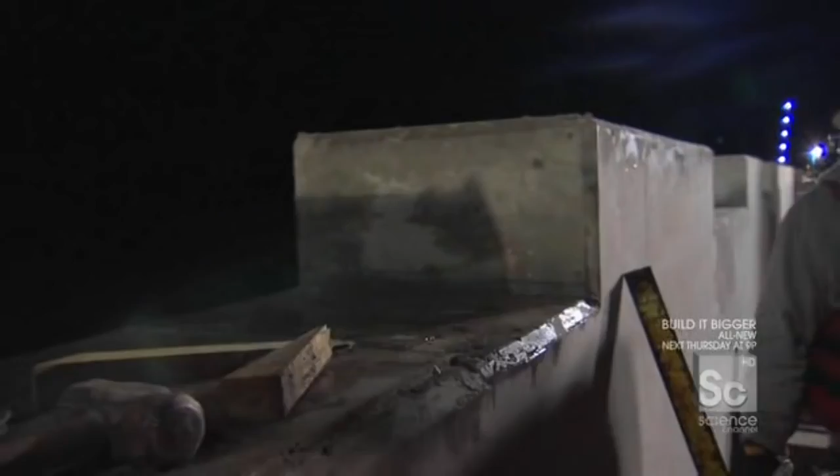Who needs a pry bar? This way it's supposed to come off and stay intact. Look at that nice edge. So we'll pop a couple more of these off? Or they'll pop. Pop a couple more, and we'll go check on the form, see if it's ready to go. I promise I won't break them. Take care of it. Nice, smooth, 90-degree, notched out finish.

With all 12 blocks removed, the wall is 36 feet closer to completion. Only a mile and a half to go.

Do you get that sense that after 5 years, New Orleans is beginning to get back on its feet? It's starting to get back. They ain't never gonna take it away from Louisiana. We've still got it, we're just putting it back together so we can enjoy it again. And this wall's a big piece of that. It's gonna be a big part of it. Makes you kind of proud of what we're doing. Right now we got work to do, we need to get this done.

In just 9 months, the surge barrier will be operational, giving the people of New Orleans hurricane protection that they've never had, and the confidence to come home and rebuild in the city that they love.

See, this is my home away from home, and I just love looking at New Orleans. So, Miss Leggett, when someone who's not from here looks out and says, has New Orleans got a shot, is it going to come back? I tell them yes. Good shot. Good shot.

Miss Leggett and more than 300,000 others have already returned to New Orleans to rebuild and transform their city. The recovery of New Orleans is a complicated issue. On the one hand, if you don't hold back the water, the city just won't survive. But beyond fortifying walls, it's also about building a community, a place people want to call home. It's part infrastructure, but it's also part dining room table. And what I found in New Orleans is that they're actually doing both.